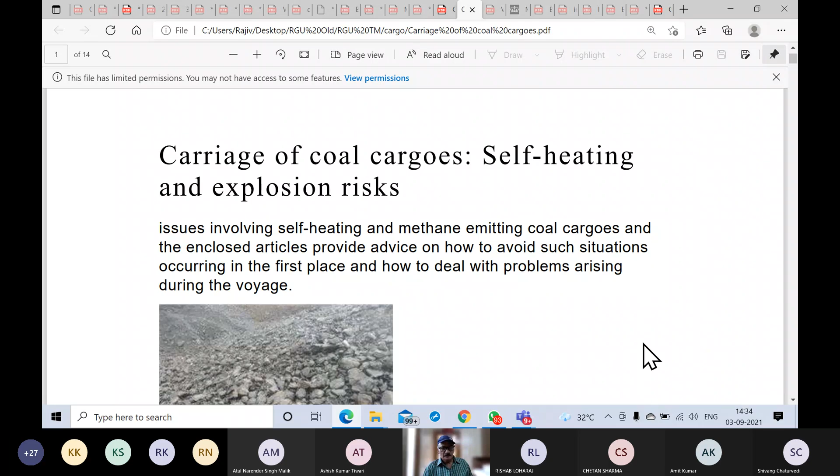At the onset, two hazards are always present: self-heating and explosion risk. These are some problems identified to start up.

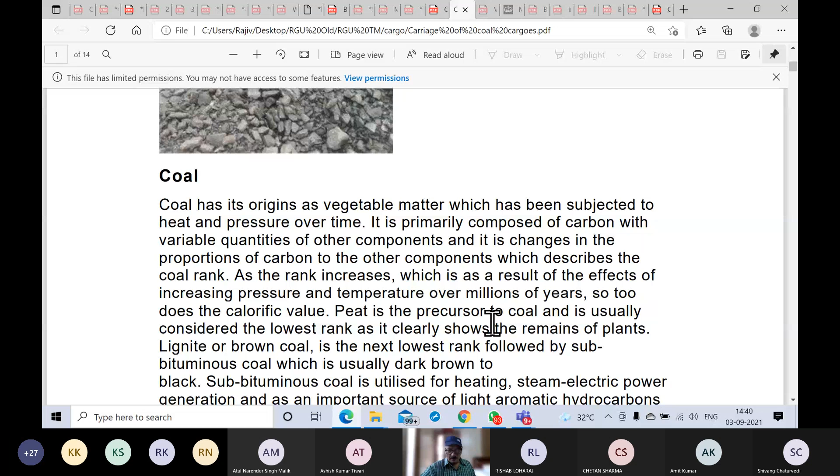It will be different kinds depending upon how much pressure and temperature this particular coal parcel has been subjected to. So it will have different kinds.

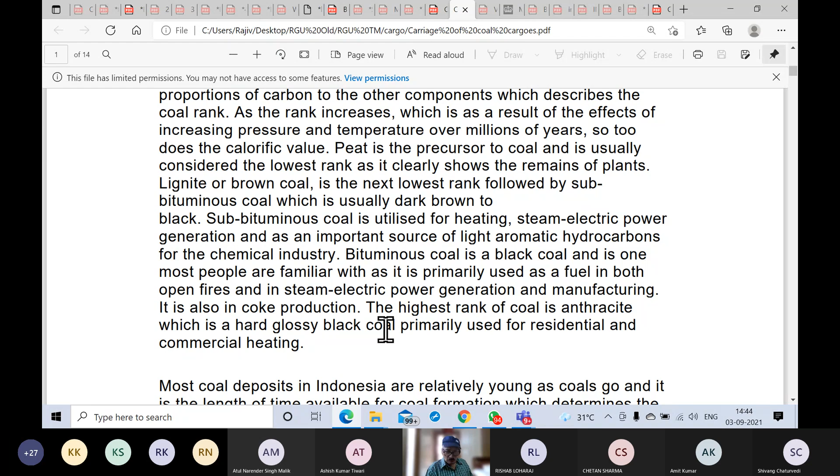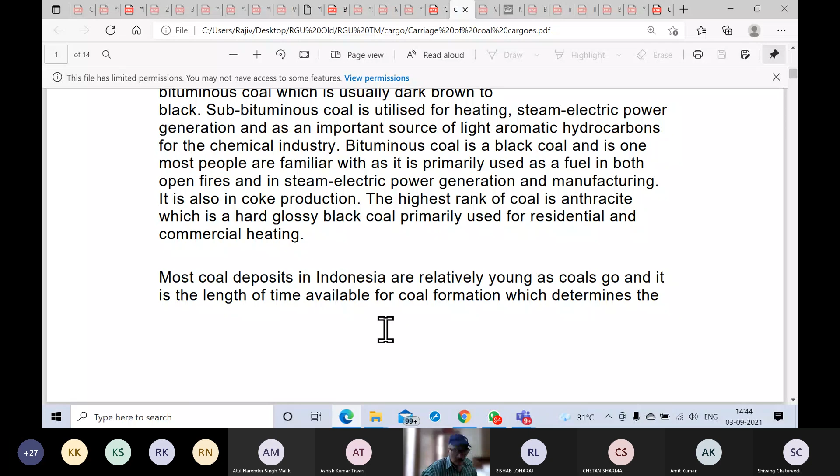One of the primary sources of coal is Indonesia. The coal mining primary source is Indonesia. Of course, we also have it, you are aware of it — coal mining is also done in India.

So by history, or by analysis of the coal found in Indonesia, it has low dust and sulfur contents, which are desirable for steam coal production. Low rank coals, which are also found here, have high volatile contents, which means they also have resin content.

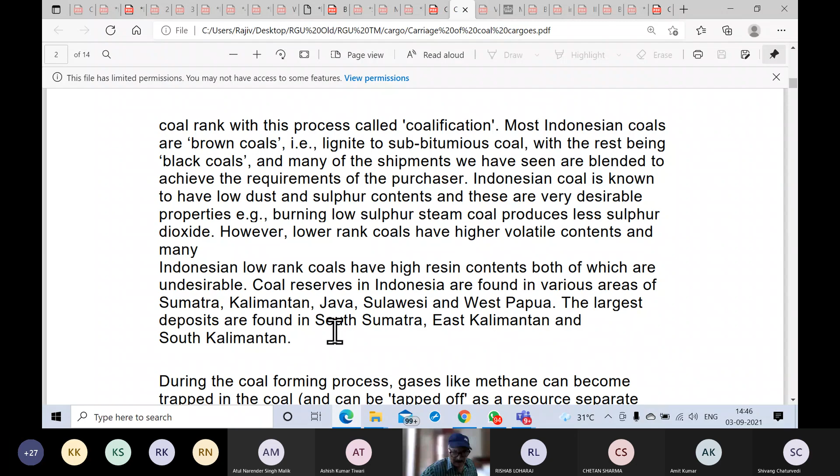And obviously this part is not really necessary, just for information, where in Indonesia this coal is found — but not really important to remember this. But this is important: during the coal forming process, gases like methane can become trapped in the coal. This feature gives rise to a significant operational and transport hazard. Methane, as you are aware, is a flammable gas.

And of course, coupled with this, the emission of methane, gases like methane getting trapped in the coal content. Coal undergoes spontaneous oxidation, has affinity to oxygen, it absorbs oxygen, and the energy released in this process is trapped. If not dissipated to the atmosphere, it can cause what is called self-heating.

Self-heating, of course, will give rise to temperature. So when coal is undergoing self-heating, it can also result in secondary hazards like production of carbon monoxide and other toxic flammable gases. Because it is absorbing oxygen, self-oxidation is taking place, so an oxygen depletion zone can be created where you're carrying coal. You may note down these as points for hazards.

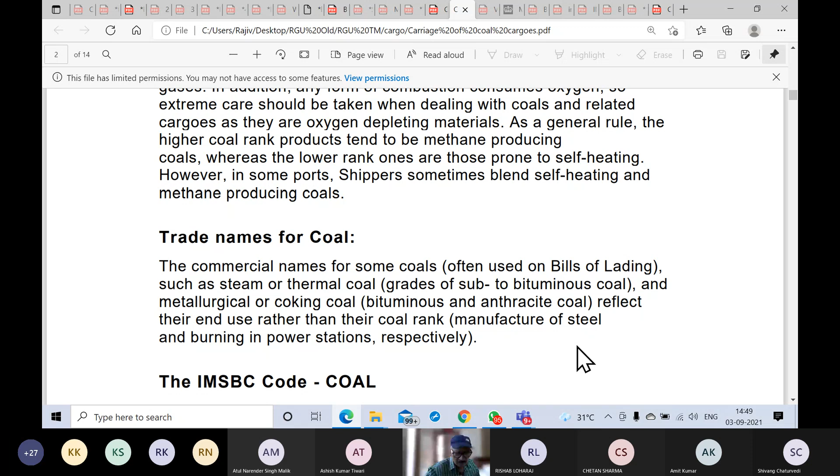Some names are used in bill of lading and MSDS, etc. Thermal coal, metallurgical coal, coking coal - different trade names for coal. IMSBC also refers to coal as a cargo, and this talks about coal classified as Group A and Group B.

As things stand, the IMSBC code refers to only one type, only one entry by the name coal. So if there is a coal cargo, it has to be declared as coal. Then IMSBC can be consulted under the heading coal, and all precautions enlisted there or ventilation procedures can be followed.

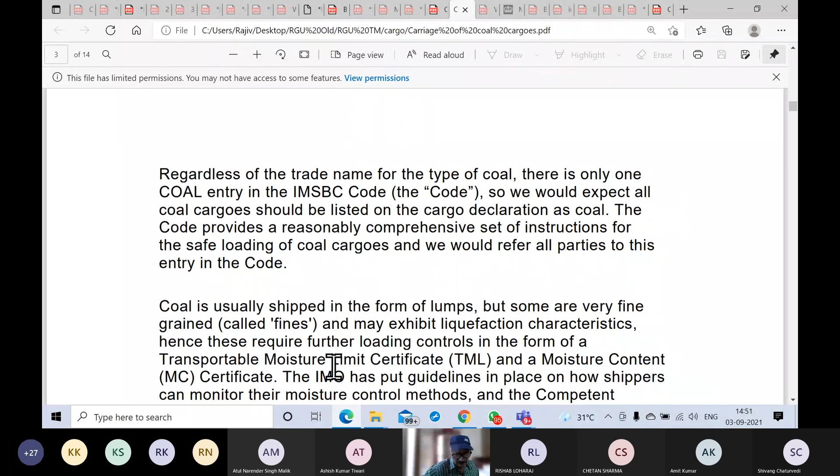Mostly coal is shipped in form of lumps, but there are cases where fine grain is also transported. When it is being transported as fine grains or fines, it has a chance of liquefaction. Then it will require declaration of TML, certificate of TML, and moisture content certificate. The IMO is going to correlate and instruct how to test for TML and MC, moisture content.

Coal slurry, as the name itself suggests, is having fine coal particles but has moisture content - it is kind of liquefaction done already. So this is also going to require TML certificate and moisture content certificate. Very simply put, transportable moisture limit has to be more than the moisture content present. There is a certificate for moisture content, which should be less than TML. Only then it can be transported.

If you have intention to carry coal, then appropriate gas monitoring equipment for the voyage should be there. Means methane measurement, oxygen measurement for depletion, if any - this equipment has to be there. Only then you will be well equipped and safe to carry coal.

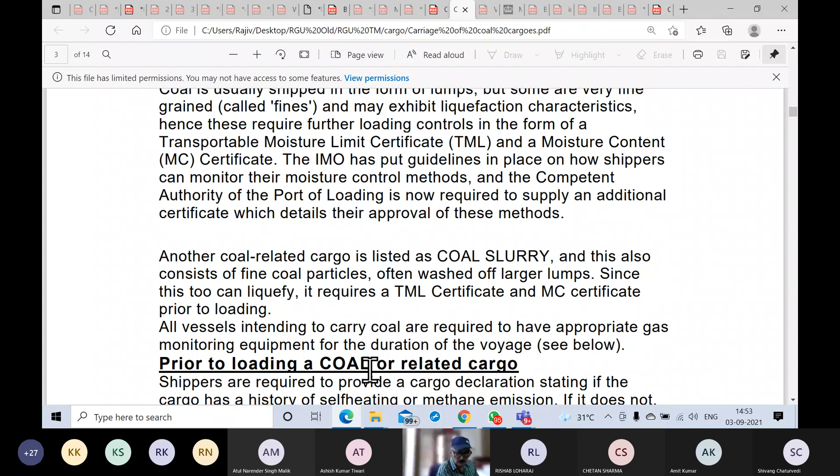So, prior to loading coal, this is what you're going to be doing. First of all, an MSDS, which will declare whether the cargo has a history of self-heating or methane emission. If this is not declared in the MSDS, then you need to go back to the shipper and ask him for this information. You cannot blindly load coal. You have to get it from him whether it has a history of self-heating or methane emission.

Now, somewhere in Indonesian coal, both these properties exist. Obviously, since there is an issue regarding self-heating or methane emission, coal cargo will require continuous monitoring during the voyage, which means self-heating will be taken care of by monitoring the temperatures, and methane by gas readings. And obviously, it goes without saying that this gas monitoring equipment should be calibrated and should have a valid up-to-date calibration certificate.

This is something the cargo officer will have to ensure - up-to-date calibrated meters and equipment, including temperature measurements, thermometers, gas monitoring. They should be calibrated and up to date. Also, training is required for all people on board as they use this gas meters or thermometers. No point in having one which we don't know how to use.

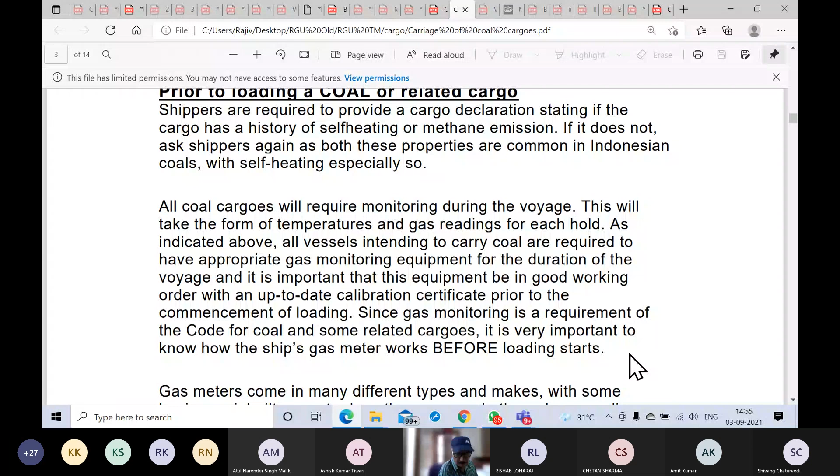For gas meters, there is a chance you may have an inbuilt pump, an aspirator. You draw the gas or the atmospheric air into this sampling point and then analyze it. It can draw the air from wherever you have lowered the sampling tube, by pumping. You press it, and when you release it, air is drawn inside and this will be analyzed, giving you readings.

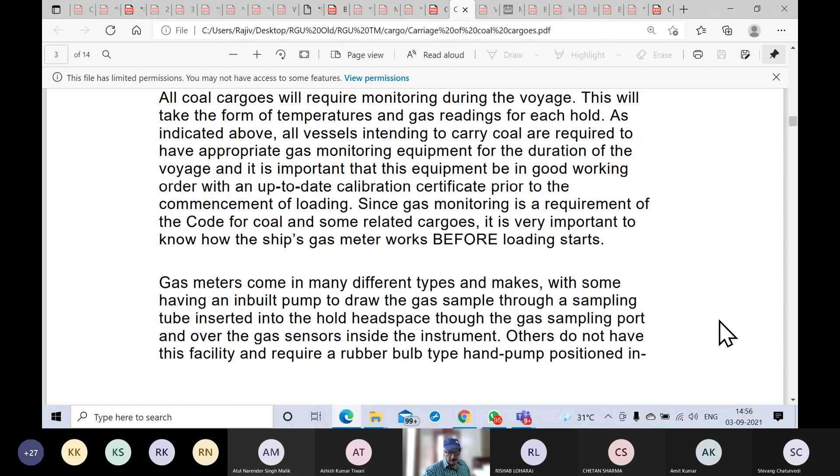You must stop after one reading has been taken to let the meter return to normal gas levels before attempting the next one.

And yes, you will have to maintain the equipment by preventing any dust, moisture, etc. from entering the tube, which can damage the sensors.

So if you are loading, and it has been declared by the shipper in the MSDS that you are loading self-heating coal, then it will have a repercussion on the O2 levels because self-heating coal will normally decrease the O2 level. It could show decreased O2 levels, as it consumes oxygen for self-heating. That is one indication that you are monitoring the atmosphere. So when you see decreased O2 levels, you know this could be self-heating. The next step, since you've recognized this is self-heating as also declared by the shipper, will be to monitor the temperature.

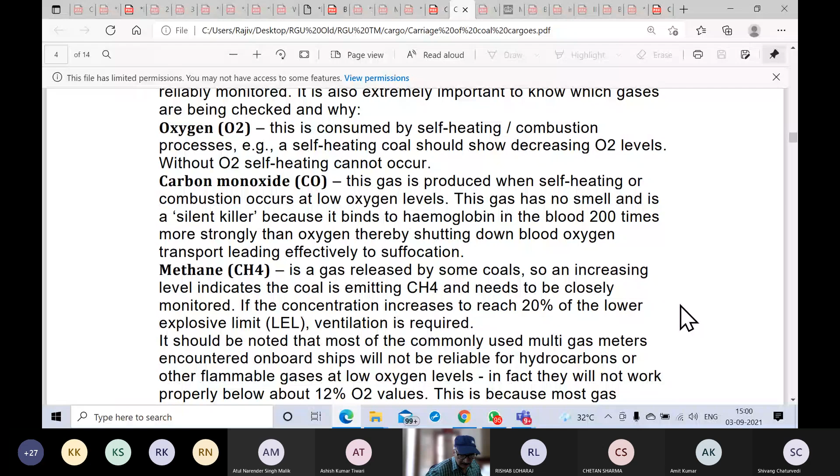So this is another problem, emission of methane, which is chemically known as CH4. That is only the chemical symbol. So this concentration is also to be monitored, and if it reaches something like 20% of the LEL, lower explosive limit, then ventilation has to be done.

Actually, you should be having on board multi-gas meters, which can monitor several gases like carbon monoxide, methane, and oxygen included, multi-gas.

So there is a problem regarding hydrocarbons reducing the oxygen levels, and most of these meters will not work properly below 12% O2 values, because most gas meters use combustion sensors which require oxygen to function. If you have a low oxygen content value, then the meter itself will not function properly.

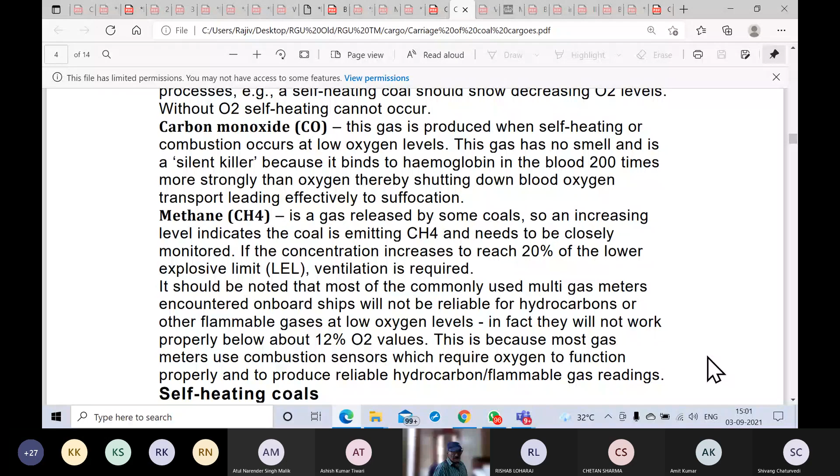This is very important. As mentioned by IMSBC, coal shall only be accepted for loading when the temperature of the cargo is not higher than 55 degrees Celsius, because it has a tendency for self-heating. So any parcel of cargo with a temperature more than 55 degrees Celsius is not supposed to be accepted for loading.

Now you see, obviously there are issues. The shipper may declare that the coal has a history of self-heating. Then you have to monitor temperature during loading, prior to loading, and during the voyage also. Now suppose the shipper has declared there is no history of self-heating, but as a prudent action you will still need to monitor the cargo temperature anyway. So you monitor temperature during the voyage, but before loading you check that this parcel does not have a temperature above 55 degrees Celsius.

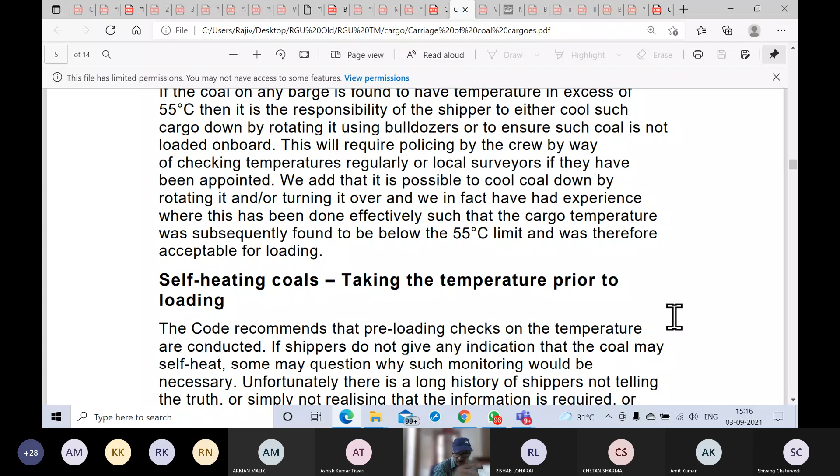Now, suppose the shipper has not given an indication that this coal by history has self-heating history. So it does not mean that it absolves you from checking temperature, because unfortunately shippers do have a habit, for commercial impacts, of not telling the truth.

So without placing too many question marks, you will back yourself for monitoring temperature to determine if the coal is self-heating.

Now in Indonesia, most of the coal is brought alongside the vessel from barges. Ship's gear, crane, grab is used to load the cargo which is there in the barges alongside to the vessel. So monitoring does become an issue.

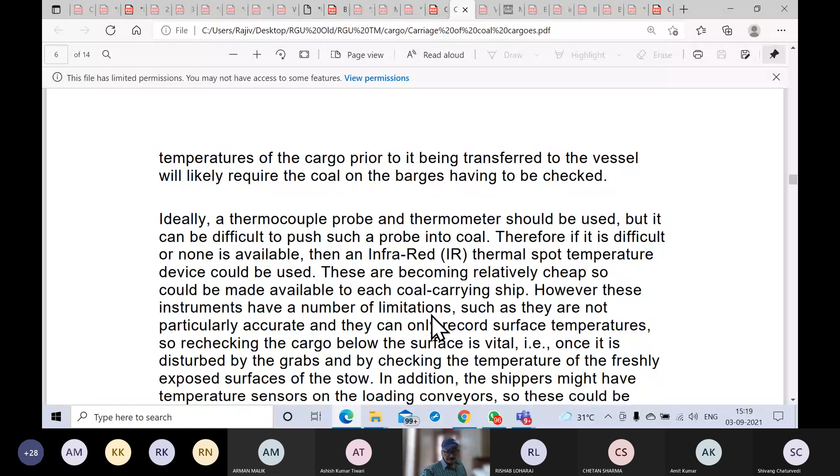Now it is not enough to measure or monitor the temperature of the surface only. You should be monitoring below the surface. Once it has been disturbed by grabs, you must check again and again.

Also, if possible, good shippers might place temperature sensors on the loading conveyors itself. So these can also be monitored if access is granted on the loading conveyor itself.

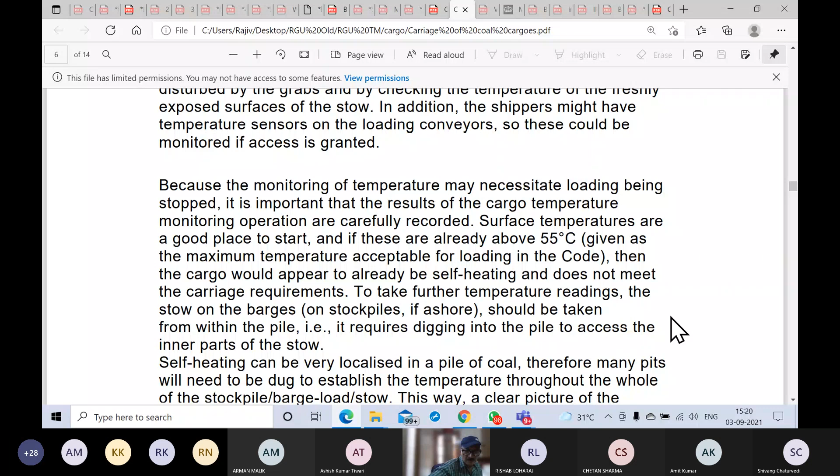Self-heating may not be happening into the whole of the pile. It may be localized, or it may be a localized heating which could lead to temperature rise. So just by taking the temperature at one area, you cannot be sure. You will have to keep monitoring the temperature as the level of the cargo drops, or if you're doing it

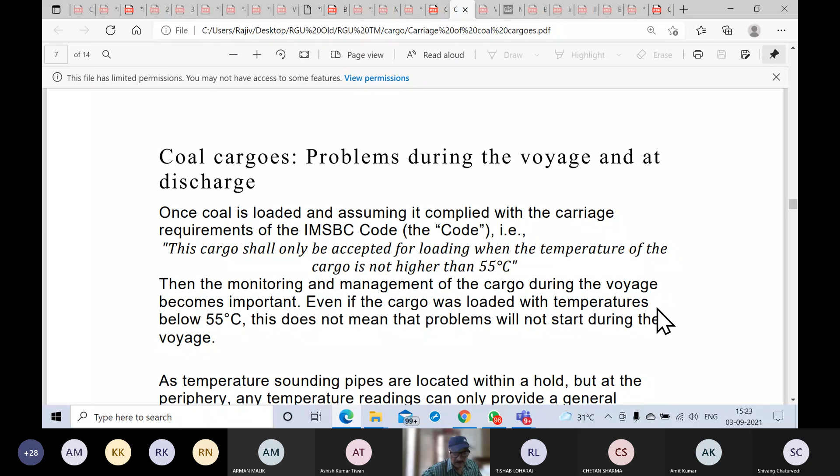So, what about problems during the voyage and at the place of discharge? Monitoring temperature, management of the cargo, and getting gas monitoring also done is one of the things which you will always follow. Although said to be very easy cargo, no concerns, but these are concerns.

Now, because the cargo could be self-heating, even if it was loaded with temperatures below 55, it could have a repercussion later on in the voyage, because self-heating can give rise to the temperature although loaded below 55.

One of the good ways of monitoring temperature inside a hold at different levels is to lower the temperature sensor through the sounding pipe of bilges. The bilge pipes start from top and go right down. You can monitor temperature by lowering the thermometer or probe and stopping at different levels in the bilge sounding pipe. So you can have an idea.

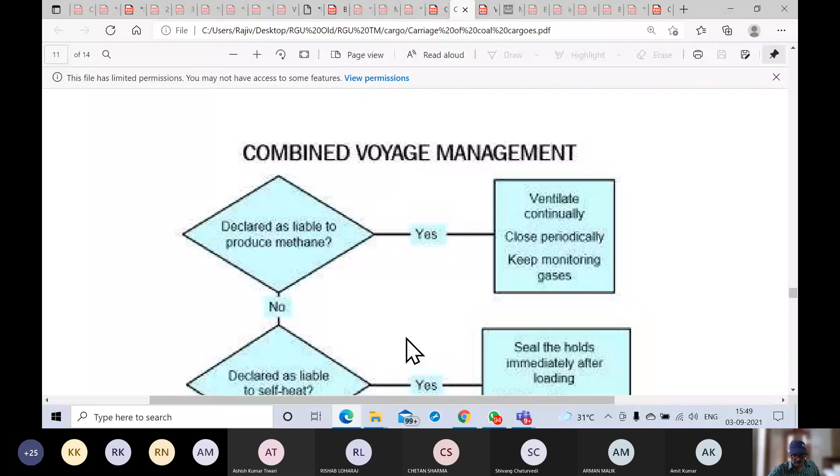The second aspect could be, is it being declared as liable to self-heat? If the answer is yes, then you have to seal the holds immediately after loading. If the carbon monoxide component is rising, then you have to seek expert advice.

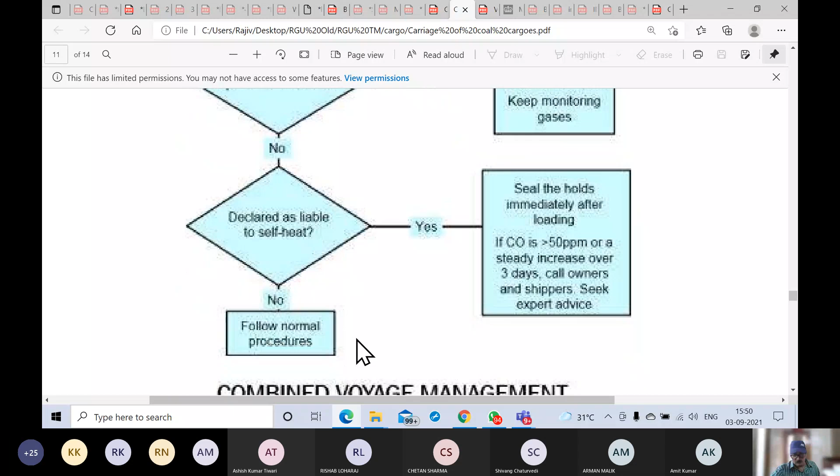If the answer to this is no, then you have to go here. If this answer is also no, highly unlikely, but if it is no, then you have to follow normal procedure. You are in the safe zone. Neither is it producing methane, nor are you declared as self-heating. Then you have to just follow normal procedure. You are in the safe zone.

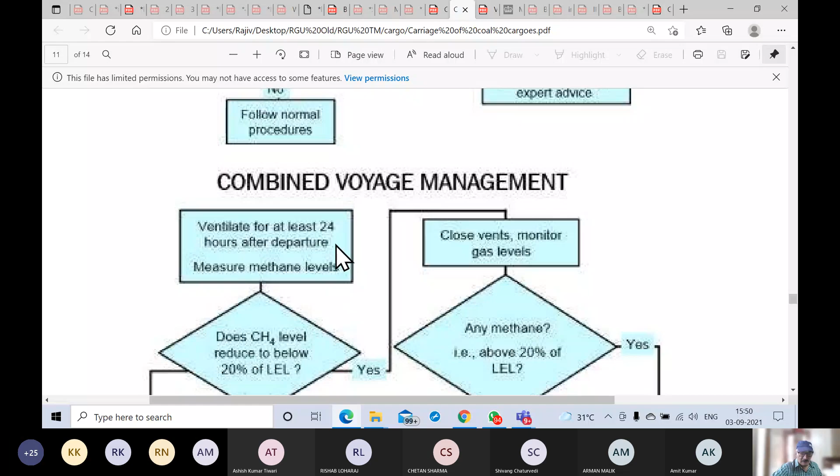Do ventilate for at least 24 hours after departure and then measure methane levels. When measuring levels, you have to close vents or close ventilation.

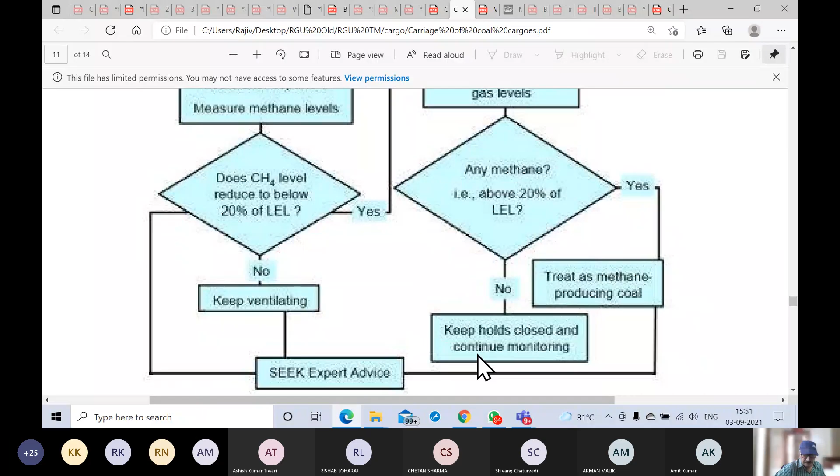Just as a guide or flowchart.

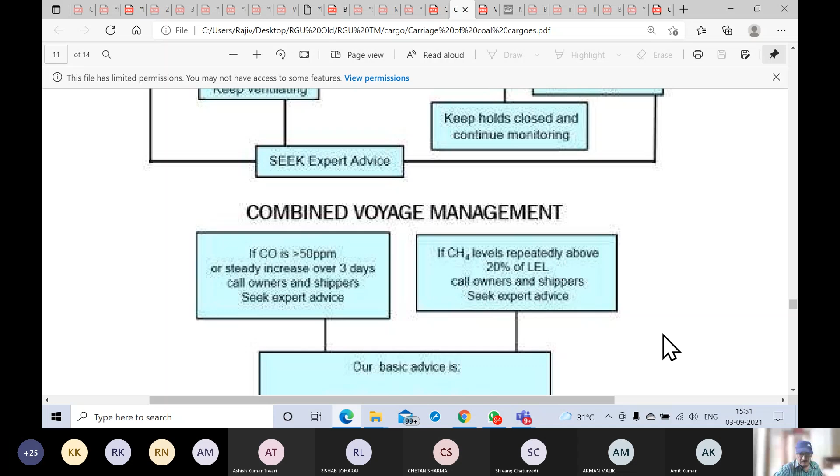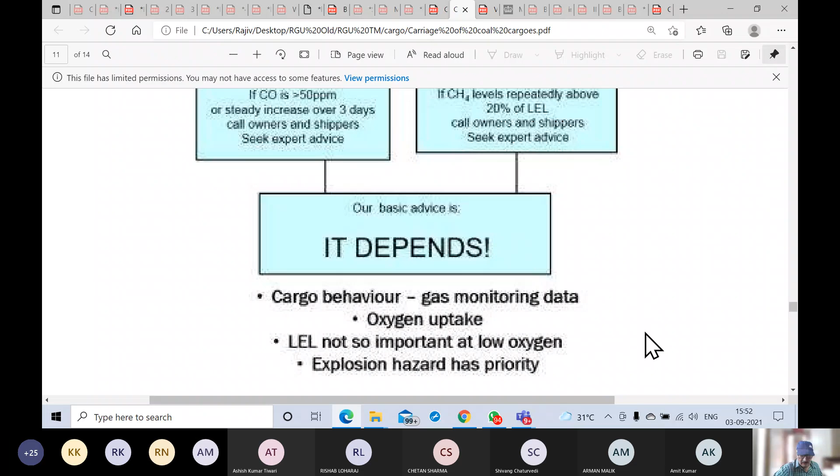Cargo behavior and gas monitoring data is not generic; it is customized from case to case.

Explosion hazard should have priority over everything, and self-heating should be avoided. Then there is the issue of coal fires, a phenomenon that occurs because of self-heating. They start as small fires and then suddenly escalate into raging infernos, producing a lot of smoke and toxic gases.

Using water to extinguish fire is an option, but that adds to the weight of the water in the hold. Adding the weight of water can damage the ship by overstressing the hull, or it could lead to slurry that can move around.

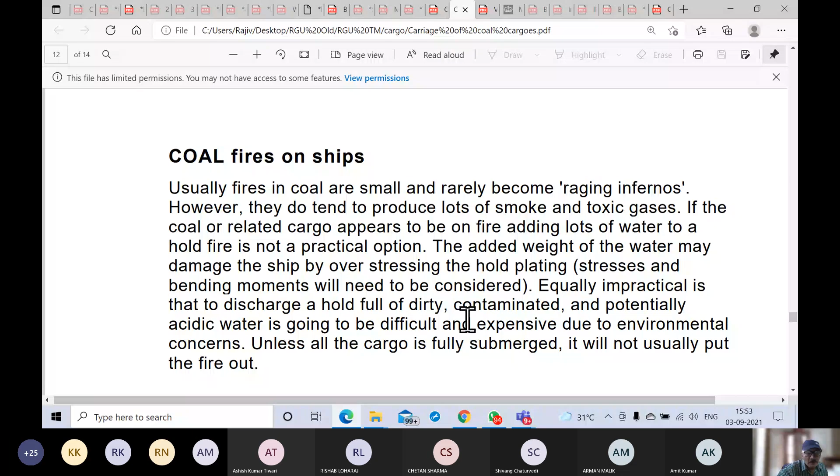Later on, cleaning of such a hold becomes very difficult. If you have added water to extinguish fire, this is done as an emergency, but cleaning afterward is also going to be an issue.

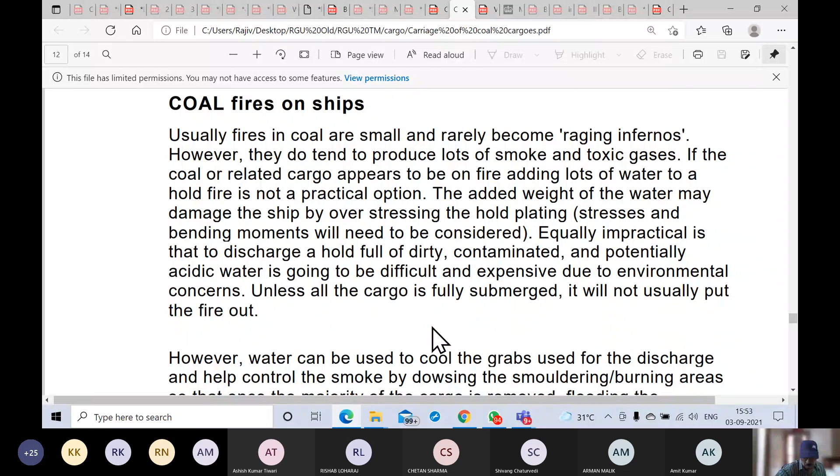So if there is a fire going on, accessing the cargo for discharge is also going to be difficult because of the temperatures.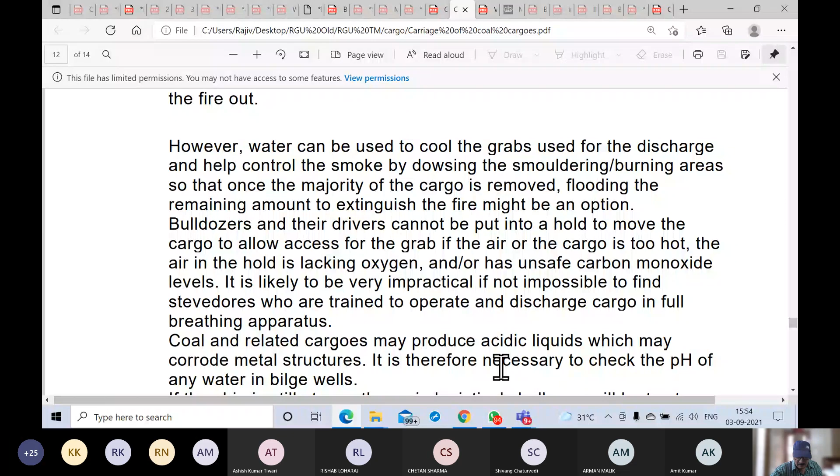What you can do normally is periodically during the voyage check the pH of the water in the bilge wells. Obtain a sample in the bilge well and check the pH value using strips, from 1 to 7, 7 to 14, to see how it is behaving. An acidic value indicates something is going wrong, and it also indicates that the bilge well itself can be harmed or corroded.

Of course, this is easier said than done. Availability of inert gases may not be possible on a bulk carrier. Inert gases can be introduced into the hold to suffocate the fire, but it may not be possible to have such a large quantity available on a bulk carrier.

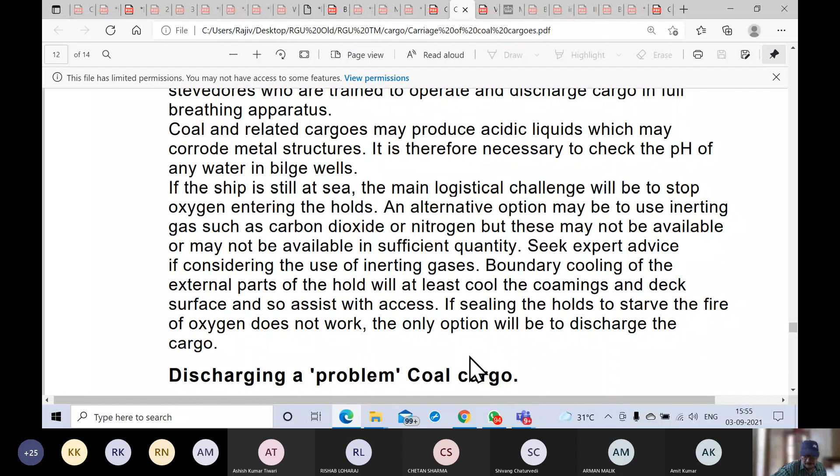So discharging can also be an issue if you have self-heating cargo. Small localized areas of smoldering, burning coal with considerable smoke can cause concern for discharging. The smoke will automatically be released as soon as the hatch covers are opened, so the situation can get worse.

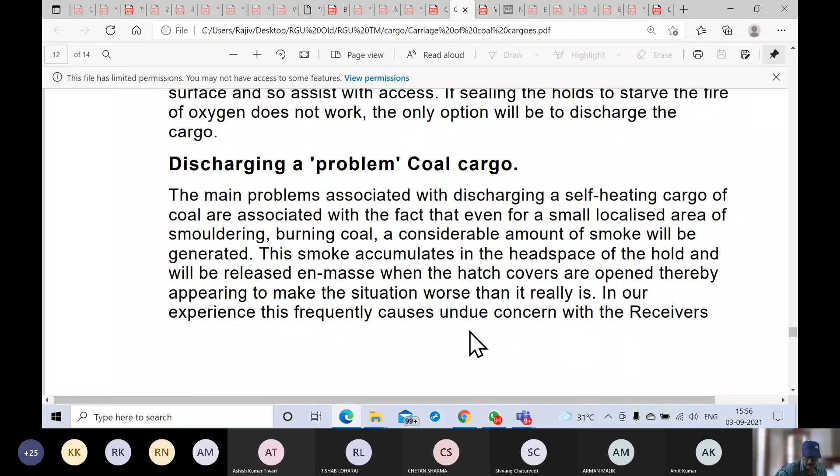Restrict the opening of the holds until everything has settled down, including where the coal will be stockpiled after discharge. Only then start opening the holds, because opening them allows oxygen to access the cargo, which can promote self-heating.

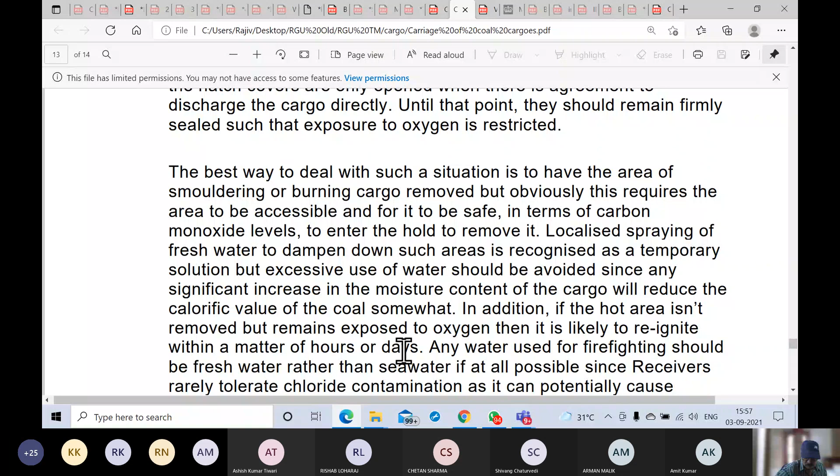Also, any water used for firefighting should normally be fresh water rather than seawater, because salt water contamination of the coal could render it unacceptable to the receivers, making the cargo useless. So it is advisable to use fresh water if you are going to use water to fight fire.

Again, availability will be a concern since fresh water is a rare commodity on board, but if available, it should be preferred instead of seawater.

Seawater should not be introduced for one reason: if this coal is bound after discharge to a power station boiler, it can cause corrosion to the boiler itself due to chloride contamination.

If you have started discharging self-heating coal, it is important that the full cargo is discharged and the holds are completely empty afterward, because partially discharged holds can have a large reservoir of oxygen gas which can feed the self-heating reactions. So discharging self-heating cargo should preferably be done completely, fully emptying the hold.

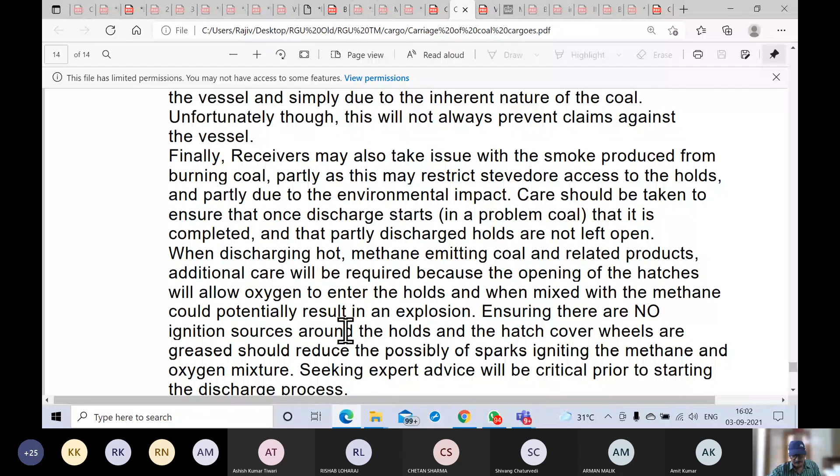So no ignition sources, of course no smoking, and the hatch cover wheels should be greased adequately to reduce any possibility of sparks igniting the methane and oxygen mixture, causing an explosion. Even that is to be taken control of.

If there is a suspicion regarding self-heating, you can have firefighting personnel from the shore also on standby. When you are already suspecting that the cargo can result in fire, there is no harm in taking preventive measures by employing

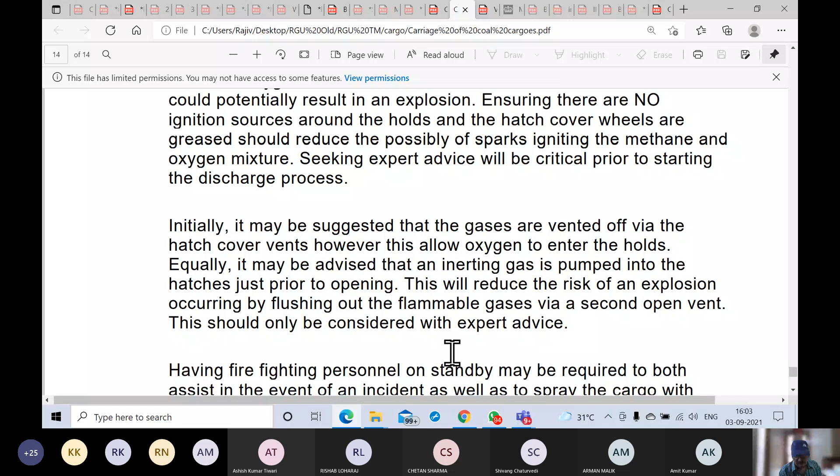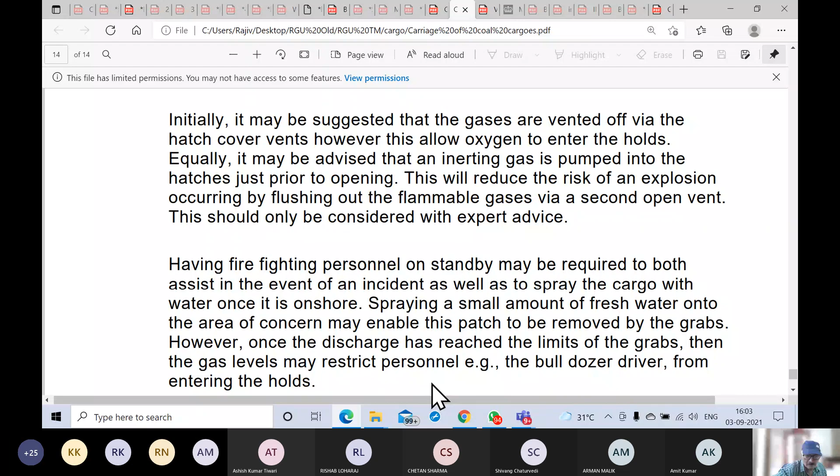So this was regarding some precautions, etc. Let's have another look at something from IMSBC regarding coal's general requirements. All information is to be received before accepting cargo.

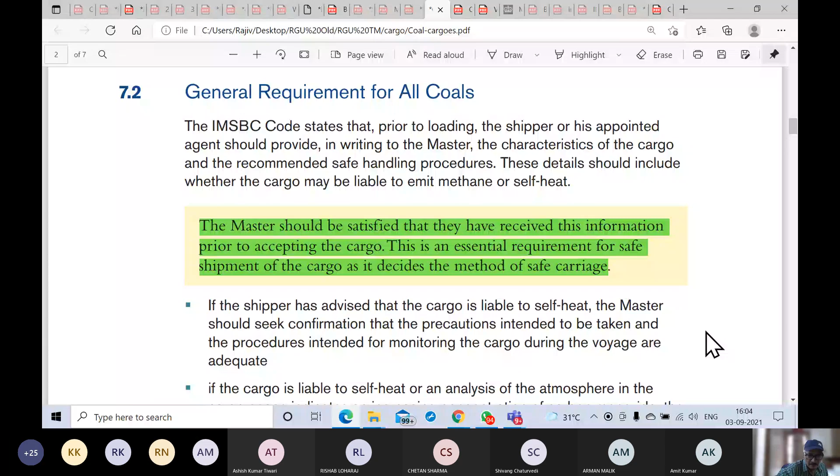Now, if it has already been declared by the shipper that the cargo is liable to self-heat by history, then you must seek confirmation and precautions to be taken from the shipper himself. Procedures intended for monitoring cargo during the voyage should also be sought from the shipper. What measures to be done, precautions to be undertaken, since he has only identified that the cargo is liable to self-heat.

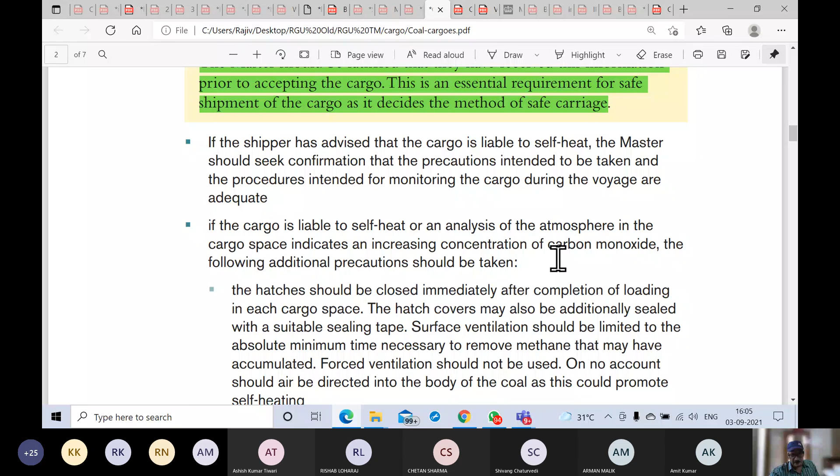If there is an indication of increasing concentration of CO, carbon monoxide, then of course more precautions have to be taken, like hatches should be closed immediately after completion of loading.

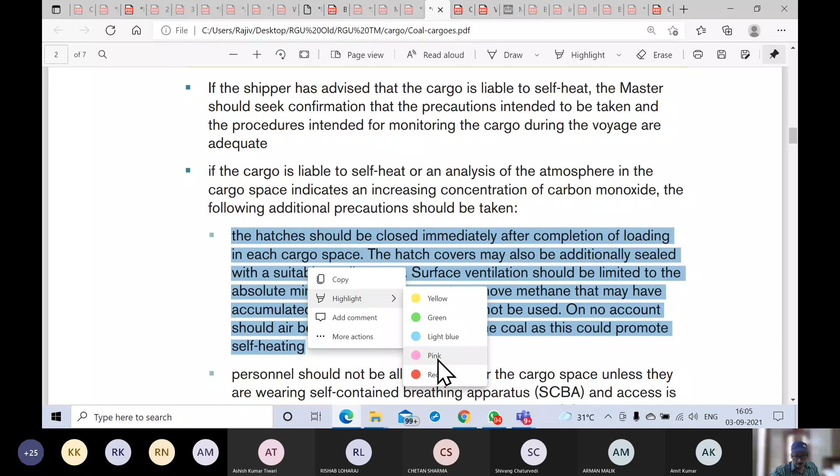Surface ventilation should be limited only for the amount of time necessary to remove methane that may have accumulated. Forced ventilation is not to be used, and air should not be directed into the body of the coal because this can lead to self-heating. Even ventilation has to be done precisely and correctly.

As we are already aware, any cargo hold or cargo compartment is to be treated like an enclosed space. That is guideline from the IMO. Any cargo compartment, irrespective of the nature of cargo, is to be treated as an enclosed space. So if somebody is making an entry into a cargo space, irrespective of what cargo, and for coal of course, we are looking at an SCBA apparatus to be worn because of oxygen depletion and maybe some methane gas. So that is essential. SCBA, of course, will be worn only by people trained in its use.

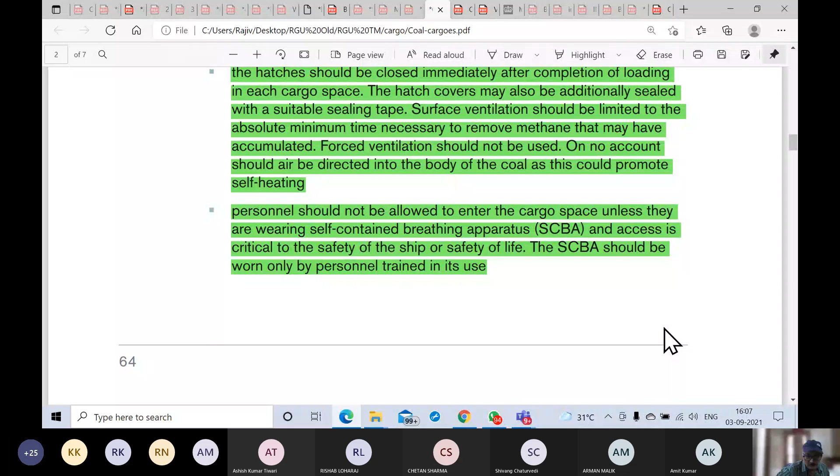When required by a competent authority, cargo spaces should be monitored. Carbon monoxide concentration in cargo space should be measured at regular intervals to detect self-heating, if any.

We had talked about it. Let's see if you can recall who is a competent authority. Competent authority - who can be addressed as a competent authority for the purpose of cargo work?

The port state of loading, the flag state of the vessel, and the port state of discharge - all these three entities can be termed as competent authorities. So I'm looking at the administration at the port of loading, the administration authorities at the port of discharge, and the flag state of the vessel. All three can be referred to as competent authorities.

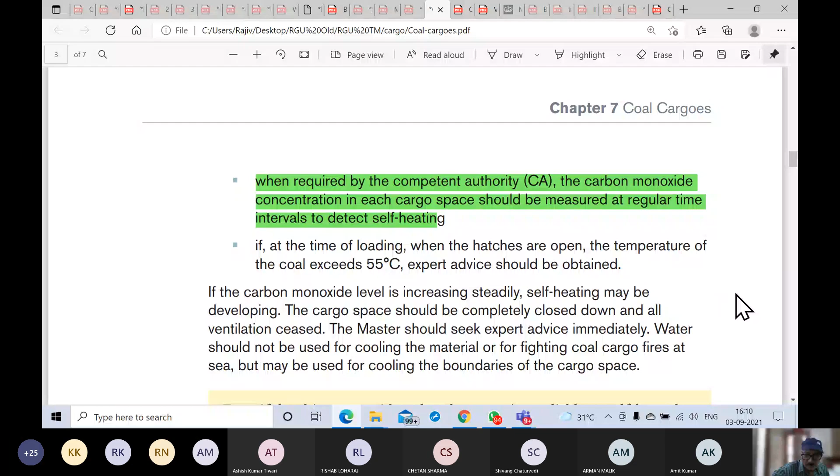By any chance, if the temperature is monitored to be in excess of 55 degrees Celsius, you have to stop and seek expert advice. When you're monitoring CO levels, if it is rising steadily, self-heating can be safely assumed. Then the cargo space has to be completely closed, with all ventilation ceased.

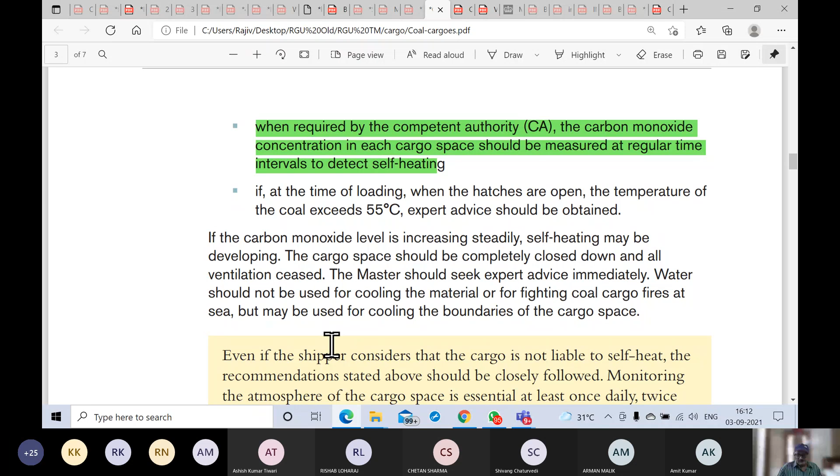Now, water is actually not advisable to be used for fighting fire, but it can be safely used and is advised to be used for boundary cooling.

I have a belief that it should be done twice every day to be on the safer side. See, you are only going to exceed what is recommended, and that is okay - you should not be below the recommended levels, which is once daily. Maybe the best option will be, at least for the first few days when you are not sure about the nature of the cargo and the changes being caused in the hold, to monitor twice daily. When you are satisfied and assured that nothing untoward is happening and things are under control, maybe you can reduce to once daily.

But I don't think it costs much or takes too much time. By monitoring temperature and gases inside the cargo hold loaded with coal, maybe you can do it twice daily.

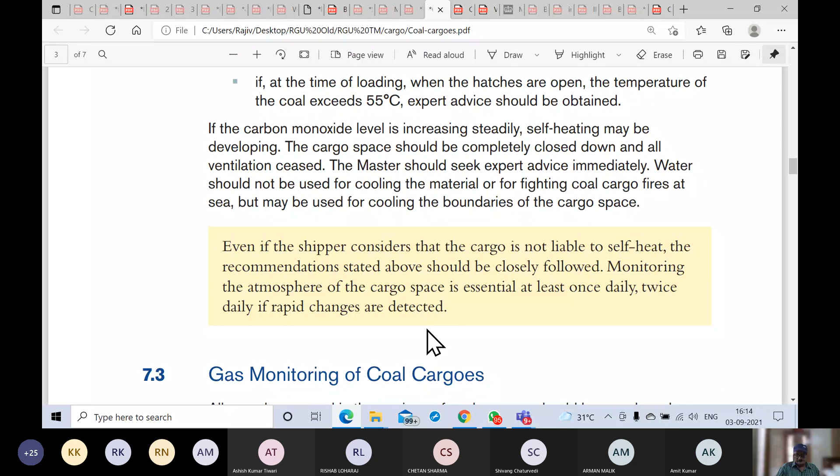Instruments should be available, even by reference to IMSBC or SOLAS - instruments measuring methane, carbon monoxide and oxygen. This is coming directly from the IMSBC code and SOLAS Chapter 6, Carriage of Cargo. So this is something you will have to take care of if you are ordered or chartered to carry coal cargo - you will make sure you have these instruments for measuring gases and temperature.

Actually speaking, it is not referring to coal itself, it is talking about a bulk cargo liable to emit a toxic or flammable gas or cause oxygen depletion in cargo space. Appropriate instruments for measuring concentration of gas or oxygen in the air should be provided. This is what the regulation says - IMSBC code and SOLAS, regulation 3 of chapter 6.

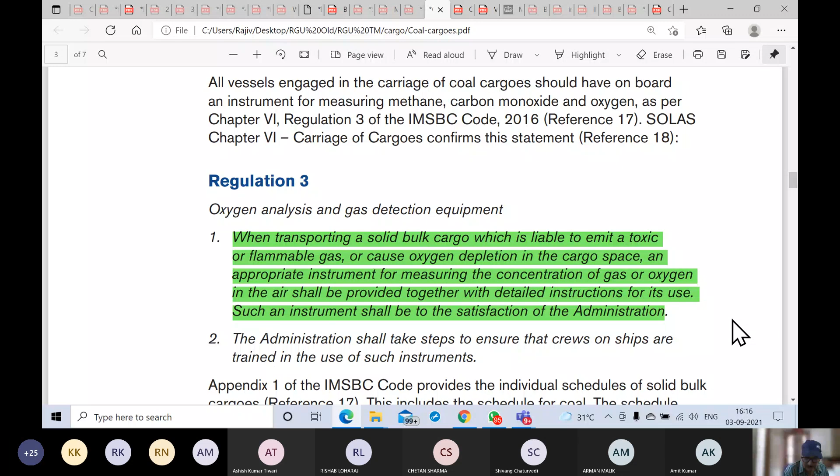Not only that you are carrying this instrument, but it is required that steps are taken by training, by drills, so that crew on ships are trained in the use of such instruments. Just having the instrument on board is not enough - the use also should be explained and trained into.

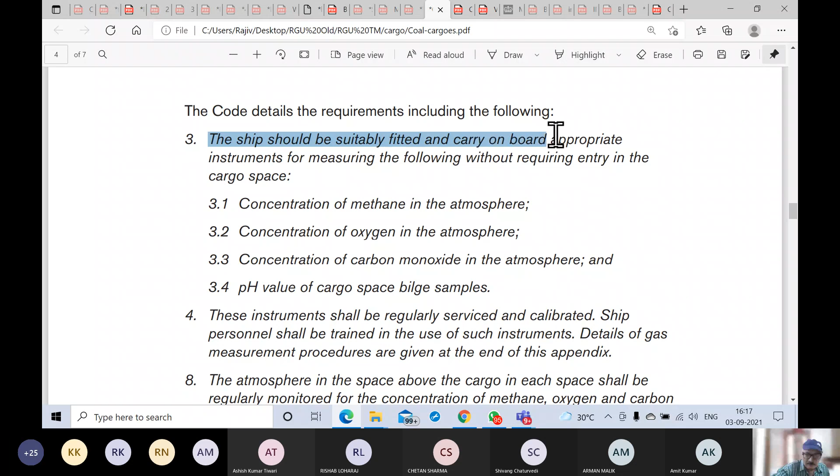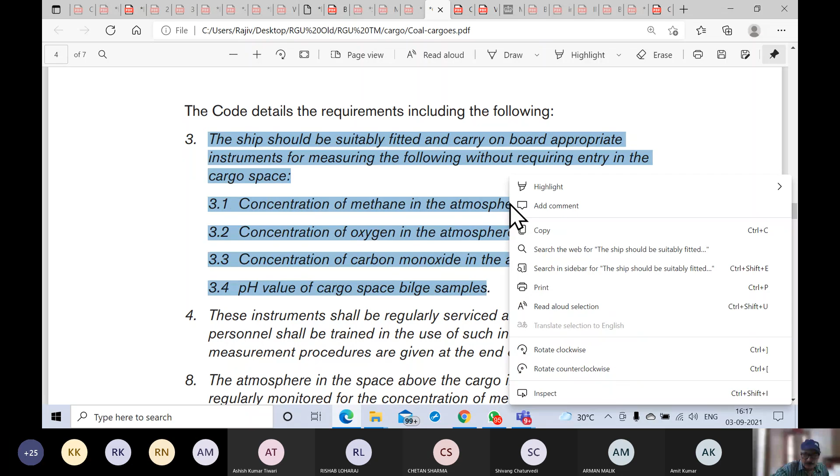The IMSBC says ships should be suitably fitted, carrying on board equipment for measuring the following items without requiring entry into the cargo space. This is a requirement - this is how the siting of the measuring instruments should be located, so that you can measure concentration of methane, concentration of oxygen, concentration of carbon monoxide, and the pH value of cargo space bilges without a requirement for entering the space.

And of course, these instruments should be serviced as per your record and calibrated. Again, no need to repeat - I think you will remember it and always quote it - people should be trained in the use of these instruments. So that is how it goes. Training is also included as part of precaution.

The results of this monitoring shall be recorded. ISM code, SMS procedure - no use of monitoring and not recording. If not recorded, not done. So you must record it also, document it.

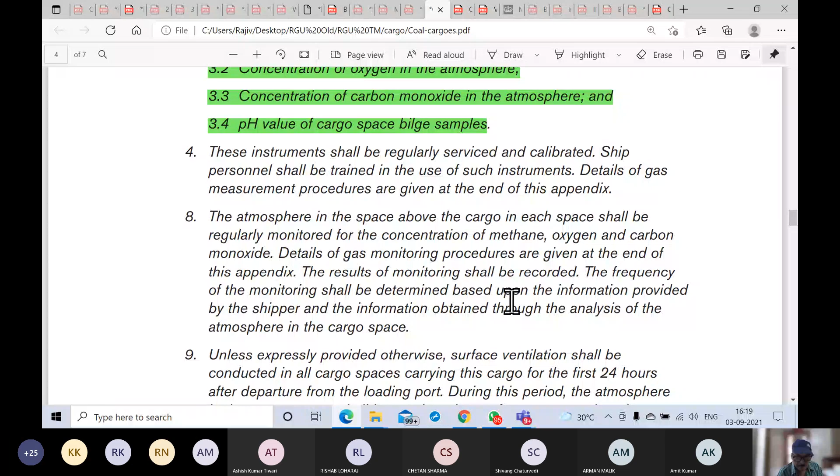If you are going to have a gas monitoring done for this period, any ventilation which you are already undertaking should be suspended. There is no point carrying out gas monitoring with ventilation in progress - that will give you wrong readings. So for that period when you are doing the gas monitoring, whatever ventilation is being done should be suspended.

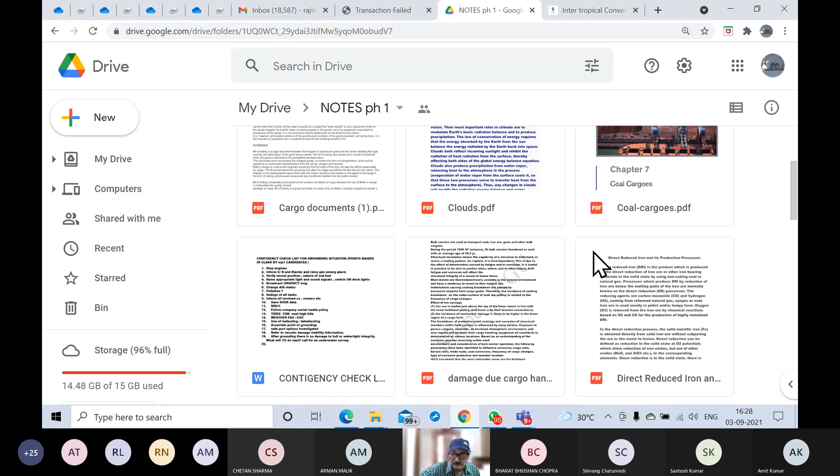Okay, since we are still on the job, time is still there. Anything else you want to raise?

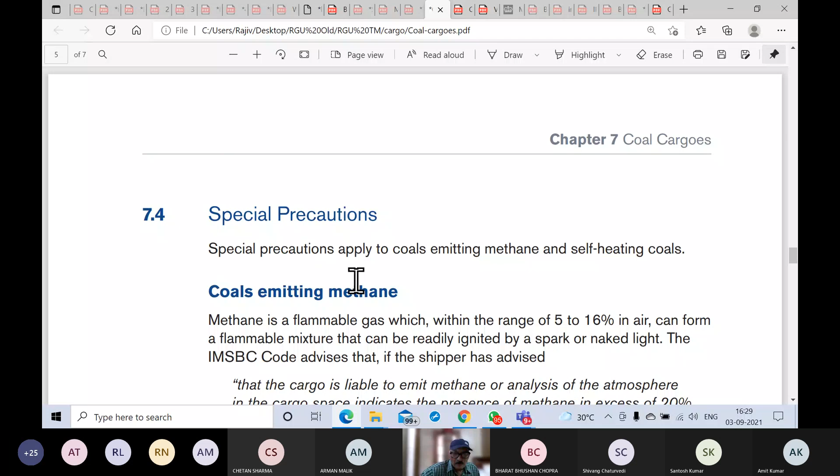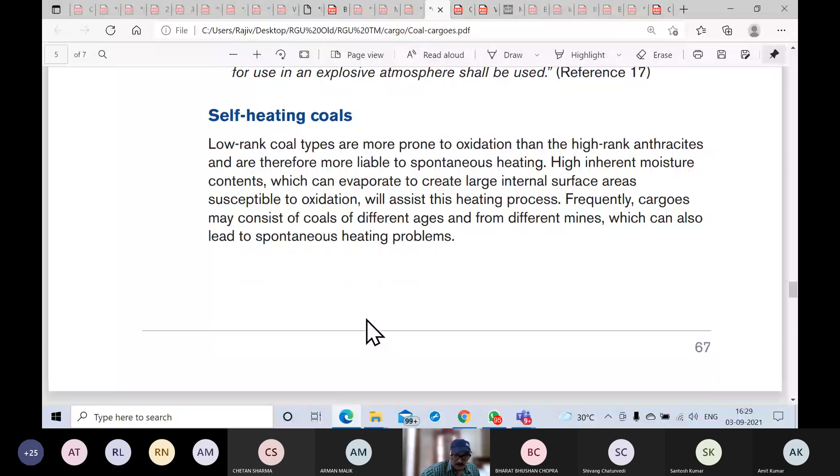So of course the topic does take care of that. Now this has reached you, you can go through it. Coals emitting methane is one thing, and coals liable for self-heating is another thing - meaning it's still coal, but these are two categories, two precautions, two hazards identified. So for this there are precautions which are termed special precautions. You know all this.

When you talk of self-heating coal, declared as self-heating coal, then these are the precautions you have to take, and this is coming from the code itself. Cargo spaces closed immediately after completion of loading. Hatch covers to be additionally sealed with additional sealing tapes. Natural surface ventilation only is permitted, for the absolute minimum time necessary to remove methane. Only for that time, natural surface ventilation. Once you are sure methane has been removed, then you stop, because oxygen also is not to be introduced into the cargo compartment, which can only promote self-heating.

Not to enter the cargo space unless absolutely necessary. Excuse me, sir - yes? Sir, which is this sealing tape? Like before you told us that we cannot apply the sealing tape if the PSC sees that, or they will raise questions. So is it that one or something else? No, it is something like that.

Okay listen to me. Since you have raised the subject, suppose there is a tape which a lot of people sitting here have heard of and used. Ramneck, Ramneck - I'll spell it out for you: Romeo, Alpha, Mike, November, Echo, Charlie, Kilo - Ramneck. Ramneck tape, okay? That is a sealing tape. And these candidates with whom we were interacting had said they were using these tapes, using it for proper sealing. So that kind of tape is advisable.

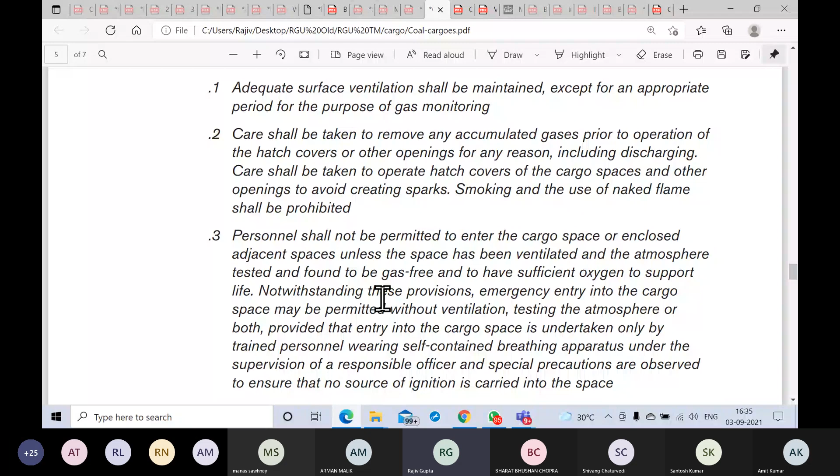These are the precautions for methane emission. I think we've gone through it, so more or less we are done. The topic has been covered, we can end our discussion here for coal cargo. Unless you have something to say, I'm going to type in the chat box which you can respond to. If you have anything to ask, say it.